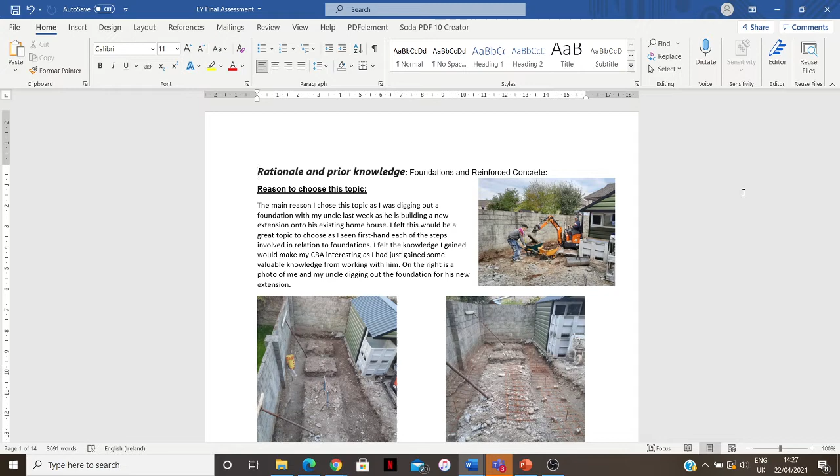Hello, Tommy Ronan here. This is a quick video just to run through my final assignment for my EY portfolio quickly. So the reason I chose my topic on foundations and reinforced concrete was last week I was actually digging out a foundation and working with reinforced concrete as my uncle was building a new extension to his house. I thought that doing this topic would be very beneficial as I had first-hand information and digging out this foundation myself.

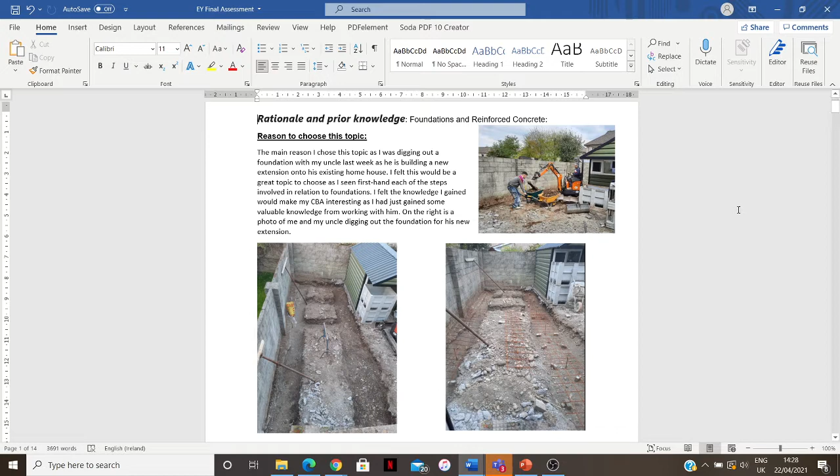So as you can see here from the photos, the two of us digging out the foundation on the top right with a mini digger. The bottom left is the photo of the foundation dug out, and the bottom right is the steel installed inside the foundation, ready for the concrete to pour. So I'm going to run through this assignment now quickly, an overview.

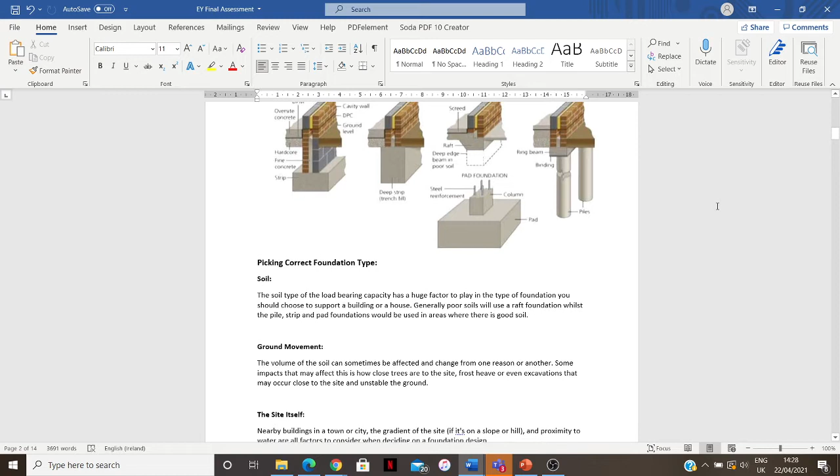So here I went through the purpose of a foundation and the foundations. I talked about the four most common foundations found in Ireland. Then I went through picking the foundation. So there's a number of careful considerations that need to be taken into account when picking a foundation type. So the soil, ground movement, and the actual site itself. So we were working with a very tight site as it's in a housing estate in town in Kilkenny. So then there's other key factors.

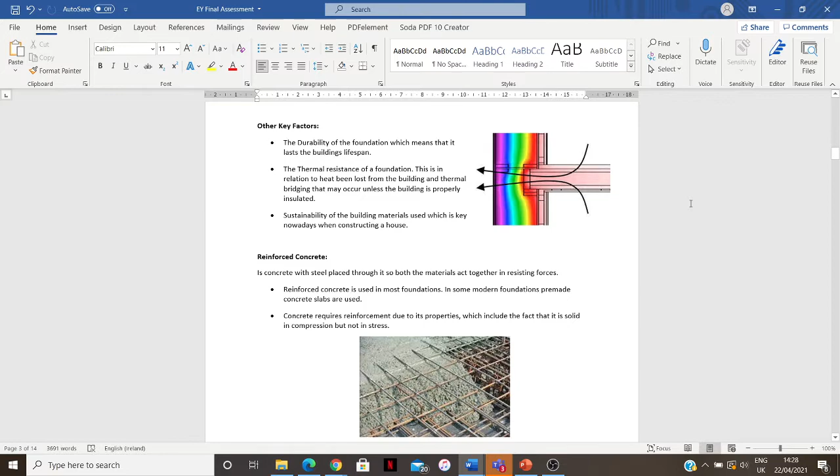I talked about reinforced concrete. So reinforced concrete is reinforcing the concrete with steel, like we did in our foundation for the extension. So then my lesson intentions, I went through three lesson intentions and my success criteria. I talked about the psychomotor, the cognitive, and affective. Then my success criteria, I talked about the introduction. I then went through key considerations in a good lesson. I went through that three times and I talked about my three different lesson intentions, and I took the same approach with higher order questions and expected answers that my students must give to me.

So this is my second learning intention that I spoke about. I also talked about discussing the method to go with in relation to an experiment, which I will talk about further as we go down through the portfolio. And then finally, my last learning intention here, I talked about. Then my organisation of my learning, went through the intro here. Then I created an open discussion. I used different teaching methods, like dividing them up into groups to use peer teaching and the jigsaw method.

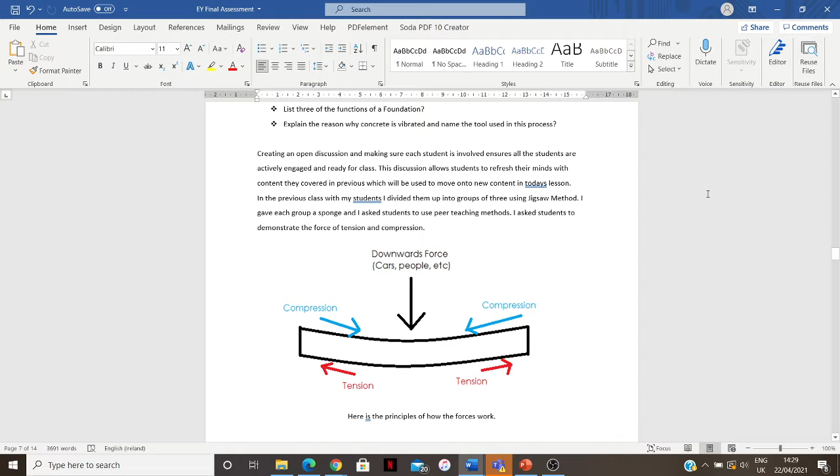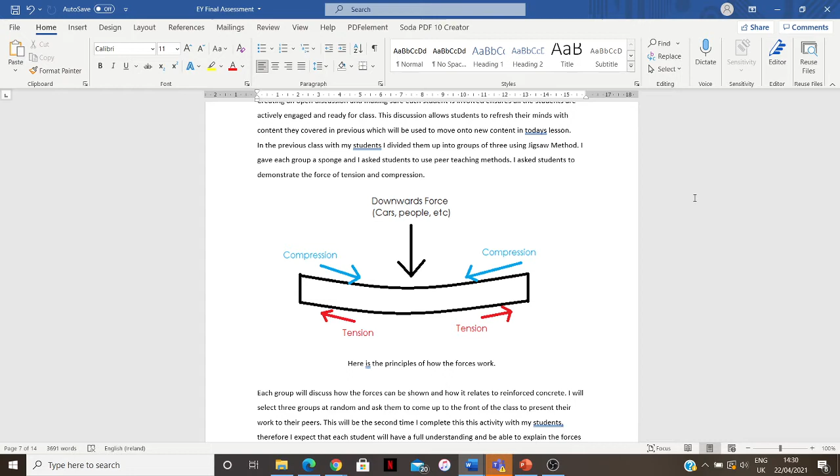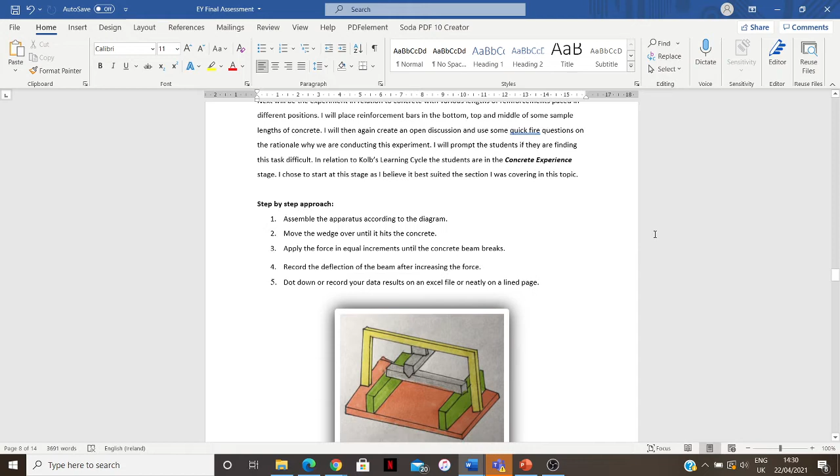Here is the principle on how forces work. So as you push the force down on concrete, you have compression on the top side and you have tension on the bottom side, like I clearly showed here in my diagram. The main body of my lesson then is here. I went through it and I talked about a step-by-step approach of my experiment. So here I have a diagram of my experiment and I have 5 steps on how to go through it for the students. Here's more about it. Main body, I talked about the abstract conceptualization and I talked about active experimentation. So this is all about Kolb's learning cycle.

Then I was on to my conclusion. Effective teaching and learning activities. So I talked about an intro here. I used a sponge activity where I used the sponge to show the forces of weight pressed on concrete. So I talked about compression and tension, like I showed in the diagram previously. This is a brainstorming diagram here that students may use to brainstorm their work.

As I go on further, the experiment I chose to do was I created different lengths of concrete and I placed steel in different positions along my concrete lengths. All my lengths were different sizes so we could test them. I made these prior to the class with the students not to waste time, as the concrete needs time to set. So here I talked about the completion of the experiment. Then I went on and reviewed analysis and data. So here is a table I created for myself, and here is another table where the breaking point was for our concrete. So conclusion then, I wrapped up the lesson.

I gave the students some homework just to test them, so they had good knowledge on how to complete the homework, so I'd be sure that they'd be able to complete it easily. So then the assessment methods, I mainly used formative assessment. So I talked about the intro. The activity I did in my lesson was using the sponge. So I did an assessment for learning, and then I did assessment as learning. So they're explained here, I have them explained. Then I did my experiment with my concrete lengths, and then the ending of my lesson is here.

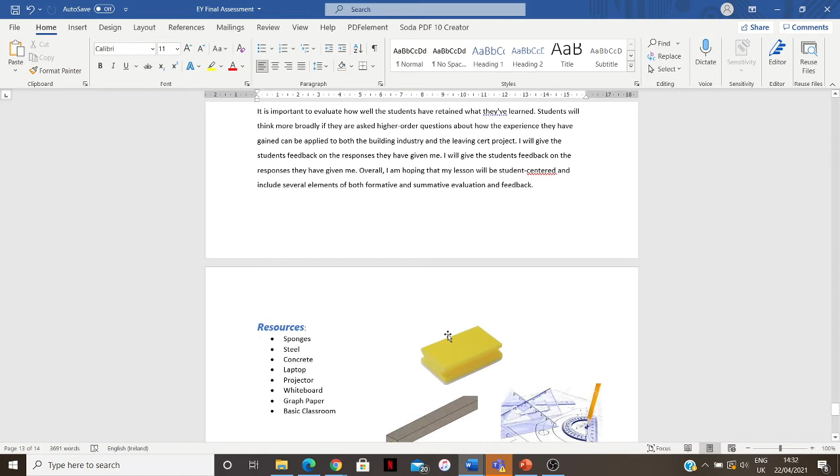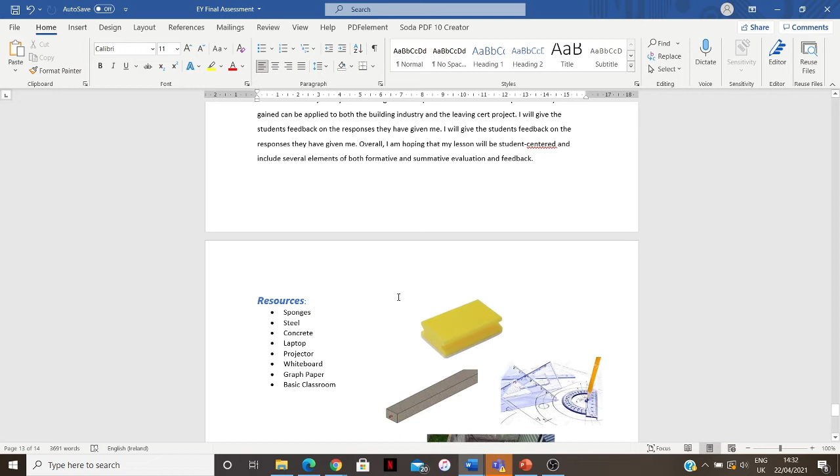My resources, so I used the sponges with the students, steel, concrete. I used my laptop. I used the projector then to show images to my students and PowerPoints. I used the whiteboard, and obviously the students used graph paper when graphing the results, and basic classroom materials, which were drawing equipment, rubbers, pencils.